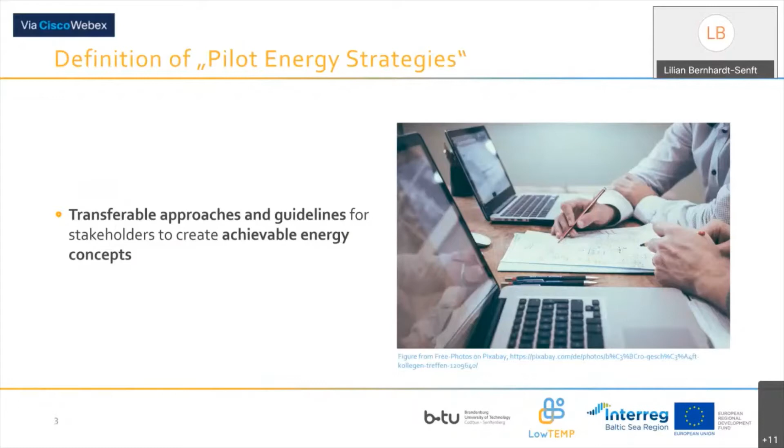What we, the LowTEMP partnership, understand by pilot energy strategies is that these are transferable approaches and guidelines for stakeholders to create achievable energy concepts. This is the main definition.

These strategies are full of information. First, they provide plans and strategic approaches for tackling current problems and identifying potentials in existing district heating systems. Second, they provide specific guidance on how to establish or integrate low temperature district heating in new and existing district heating systems. Third, they complement already existing strategies or plans, but on an informal basis.

And last but not least, and what was very important for us, they do not represent the one and only solution, but many different options that are possible and feasible.

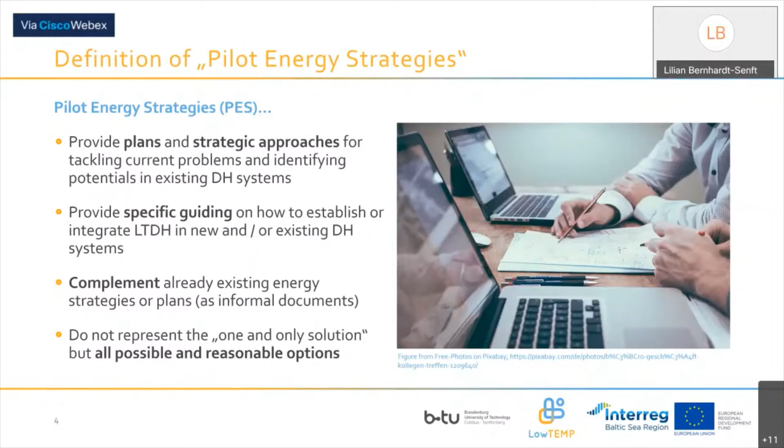Why do we need such strategies? Well, at the end, we think these strategies are one of many components that help promote sustainable energy systems and smart thermal grids, such as low temperature district heating grids, in the Baltic Sea region municipalities, and in a long-term perspective, to reach our climate goals.

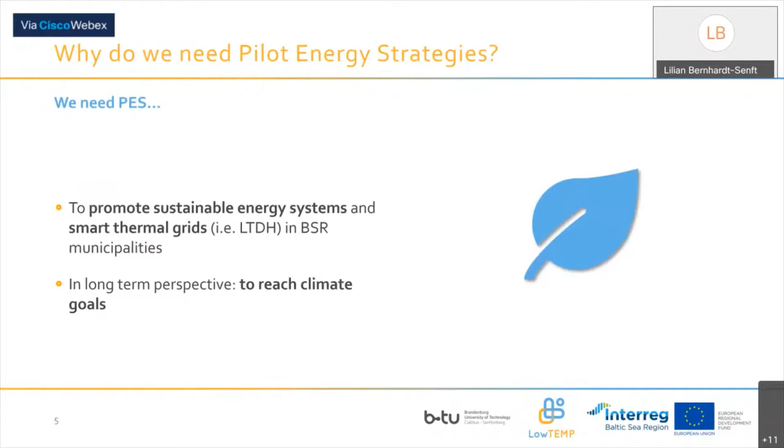Who needs and who develops such strategies? Well, in LowTEMP, we addressed municipalities, local politicians, and city councils who should play the key role in developing such strategies. But there are also utility companies, housing companies, and private owners who should definitely be involved in the developing process.

Besides that, there are further interest groups such as experts in construction and technology, financial institutions, and of course the consumers and users of those district heating systems. All of them should be involved in this process as well.

As already mentioned, in LowTEMP we have developed pilot energy strategies for specific municipalities and regions. So you might think, how does this benefit others? And this is a very good point. For us, it was important that these strategies give guidance for others on how to establish their own pilot energy strategies.

Every strategy is based on a methodology which our partners from Riga Technical University developed. Our partner municipalities use this methodology to develop their own pilot energy strategies in cooperation with the LowTEMP partnership. And this process is made visible and transparent in the pilot energy strategies, which therefore function as a showcase for other municipalities.

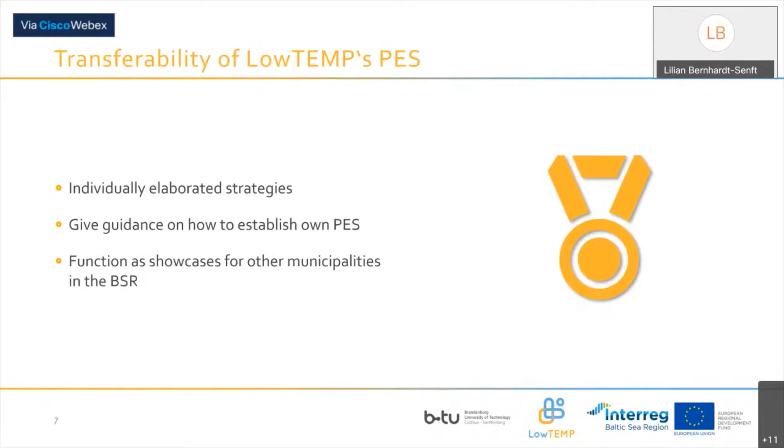After all this background information, let's have a look at the strategies we have developed during our project.

As you can see on the right side of the slide, there is a map showing different locations in the Baltic Sea region. The ones highlighted with a pink circle are the municipalities for which pilot energy strategies were developed: Gulbene in Latvia, Ilmajoki in Finland, and Tartu in Estonia. Today I would like to show you the strategies for Gulbene and Ilmajoki especially.

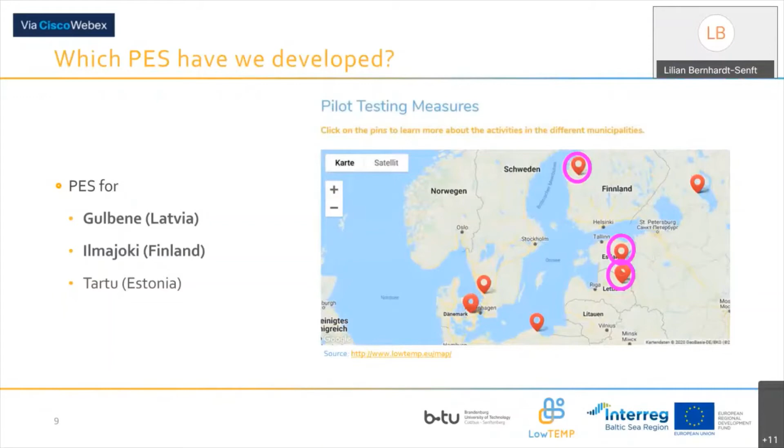When we began our work in LowTEMP and sat down with the partners from Gulbene, we recognized that in many parishes of the region, district heating was already established, but there was no low temperature district heating. That is why Gulbene municipality had one major goal: to improve the already existing district heating and district cooling systems in order to achieve maximum energy efficiency. Low temperature district heating can be one solution to reach this goal.

So the strategy should define the main directions Gulbene region has to follow in order to transition to low temperature district heating. For this, specific technical district heating solutions for six parishes and Gulbene city were created and described in the strategy you see on the right side.

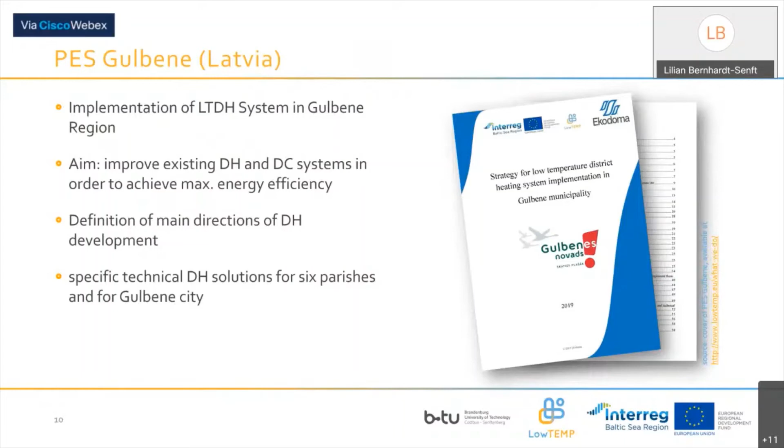But before we could start our work, we had to analyze the framework conditions much deeper. During this analysis, we saw that there are already a lot of biomass-driven heat generators, such as boilers and CHP plants driven by wood chips, wood, pellets, etc.

The next thing we recognized was that not all parishes have district heating systems, but individual heating systems in use. We also found that monitoring systems were already established, but they had to be improved to monitor, for example, fuel consumption and produced heat supplied to consumers. This monitoring system has to be improved to get more knowledge on the operation of the systems.

The next thing we recognized was that the connection of new heat consumers would not be as easy as we thought at the beginning, because a lot of people have prejudices due to the high initial investment costs they have to make at the beginning of this transition.

These are just a few things we found out during our analysis, but besides that, we monitored one pilot project that was realized in Gulbene region during the project duration, namely the pilot testing measure in Bellava village. I don't want to tell you too much because my project partner, Francesco Romagnoli, will tell you more about this later. But there, an existing district heating system was reconstructed in 2018, and the grid was rebuilt and optimized.

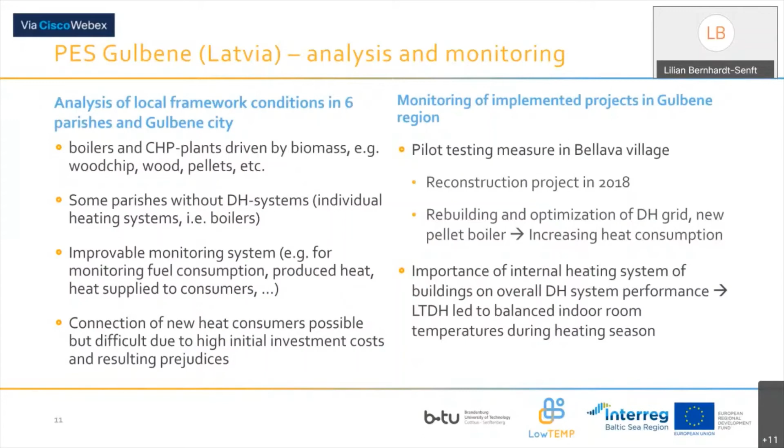Based on the analysis and the monitoring and many other things that were investigated in the pilot energy strategy, we defined the following recommendations for Gulbene region in order to increase energy efficiency by increasing the share of 4th generation low temperature district heating systems.

First, to lower grid temperature. Second, to implement renewable energy sources and the corresponding technology, such as biomass and photovoltaic panels. You have to know that Gulbene region is full of forests and biomass is available there a lot. Third, and what we have seen in some of the parishes, surplus heat from the local industrial sector is available, and this can be and should be used for district heating as well.

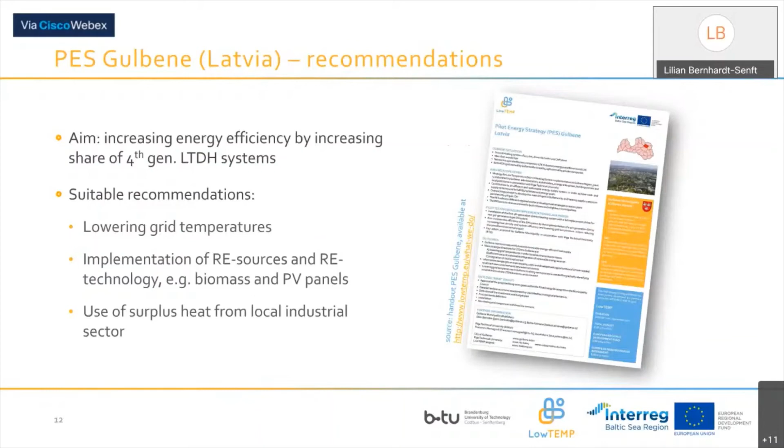At the end, we have seen that the developments in Gulbene region regarding low temperature district heating exceed the average developments that have been done so far in Latvia. Information campaigns are really, really necessary, as we have seen some slides before, to encourage the people living there to become district heating consumers.

What we can also say is that Gulbene region consists of many small parishes, and the process of implementing low temperature district heating will take a lot of time because there are so many small district heating grids. And all of this speaks for the need of a strategic plan, especially at the end user side, when it comes to retrofitting measures of buildings and the modernization of the internal heating systems.

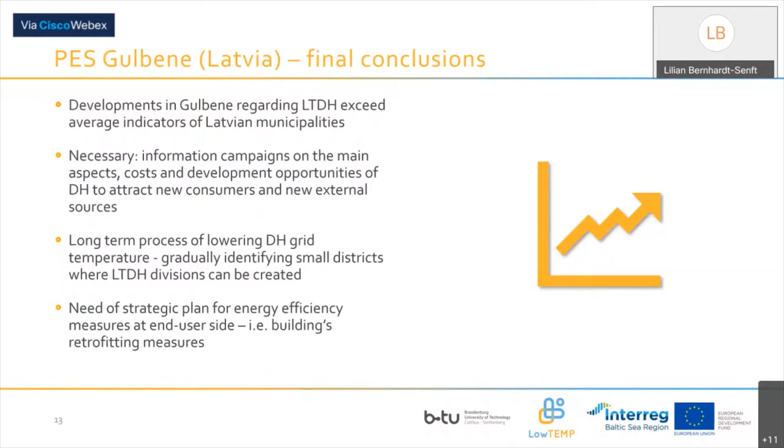Okay, so that was Gulbene municipality, and now I would like to make a big jump with you from Latvia to Finland, namely to Ilmajoki. Ilmajoki stated at the beginning of the project that they want to implement low temperature district heating systems. In order to do so, the already existing district heating systems have to be improved to achieve maximum energy efficiency. The main issue in this region is the low settlement density, which we will see on the next slide.

As in Gulbene, and on the basis of the aims in Ilmajoki, the pilot energy strategy should define the main directions of the upcoming district heating developments and show specific technical district heating solutions, while considering surplus heat, which can be taken from the neighboring community Kurikka.

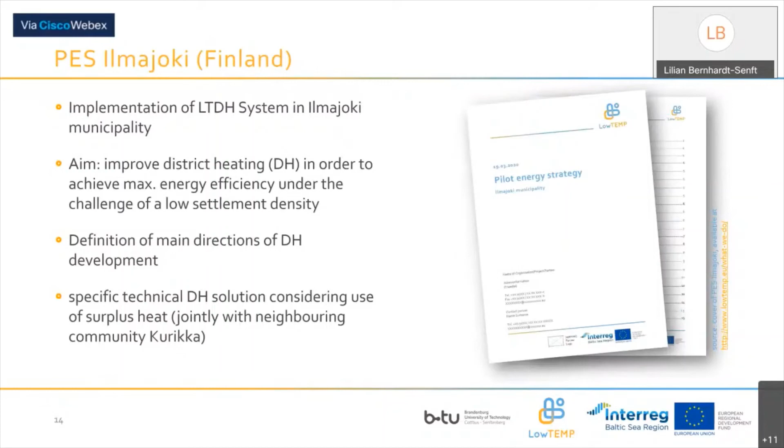As mentioned on the slide before, we face one major issue in Ilmajoki, namely the sparsely populated region. In Ilmajoki, we have around 14 inhabitants per square kilometer, but the Finnish average is around 19 inhabitants per square kilometer. Just to remember, in Germany, we have an average around 233 inhabitants per square kilometer, and in Poland, around 124 inhabitants per square kilometer. So this is a very low settlement density in Ilmajoki.

Besides that, we have found out during the analysis, the building sector in Finland needs a lot of energy, namely 40% of the total energy demand of the country. The regional district heating market share amounts to around 33%, which is lower than the national share of 51%. About 60% of district heating demand is produced in decentralized heat-only boilers. And these boilers are driven, in most of the cases, by wood chips and peat.

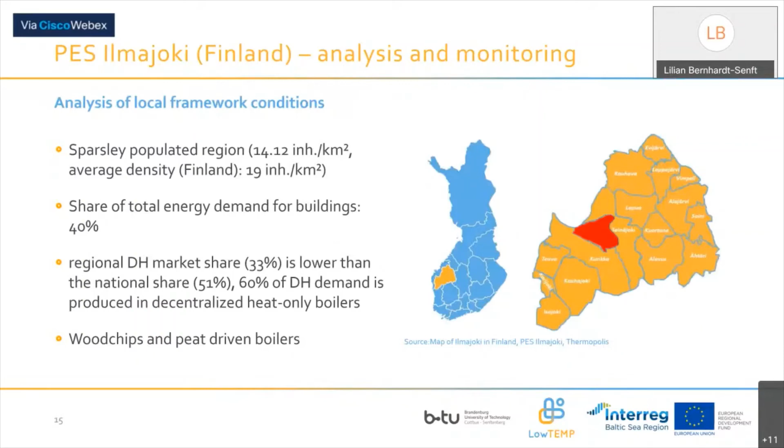Based on the analysis and many other things that were investigated in the pilot energy strategy, we defined the following recommendations for Ilmajoki in order to increase energy efficiency under the challenge of a low settlement density. First of all, lowering the grid temperatures. Second, replacing peat by integrating alternative energy sources, such as surplus heat from Koskenkorva, for example, or from somewhere else, or integrating heat pumps. And last but not least, improving the energy performance of the buildings in Ilmajoki.

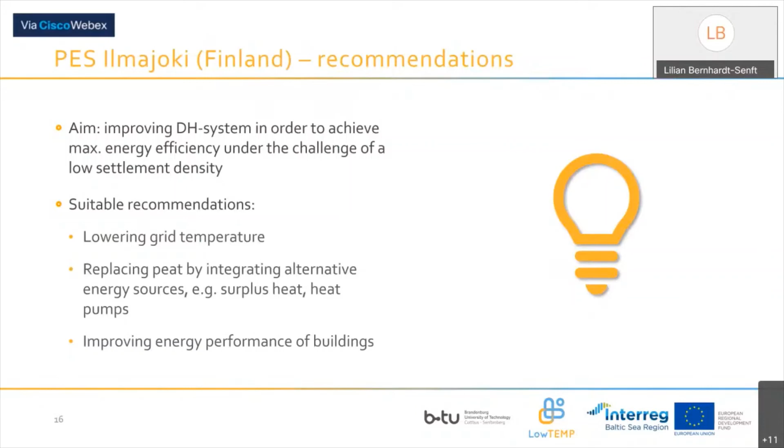When reducing the grid temperature, we suggest to eliminate any deficiencies in generation and distribution, but also to improve the monitoring part of the system by integrating new technical solutions such as IoT, otherwise known as Internet of Things. The integration of surplus heat can happen through the cooperation with Koskenkorva, where heat can be taken as a main energy source and be utilized with the help of heat pumps.

As in Gulbene region, Ilmajoki and the surroundings are full of forests, and due to this, biomass, especially wood chips and pellets, is still another energy source alternative for peat. And just like with Gulbene, improving the energy performance of buildings is very important in order to increase the share of low temperature district heating. And in Ilmajoki, this goes hand in hand with Finland's housing policy, and this is very helpful for the developments in Ilmajoki.

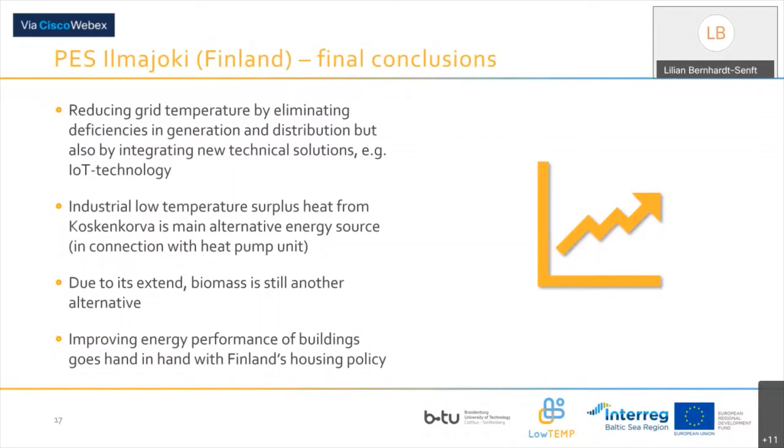At the end of this very exciting project, we can say that with these developed pilot energy strategies, we definitely help with the promotion of low temperature district heating in the specific regions. But we also created transferable approaches for other regions in the Baltic Sea region. And we hope that we not just assist, but also inspire them to develop their own strategies, especially with all the background material that was created within this work, such as the methodology I just mentioned before.